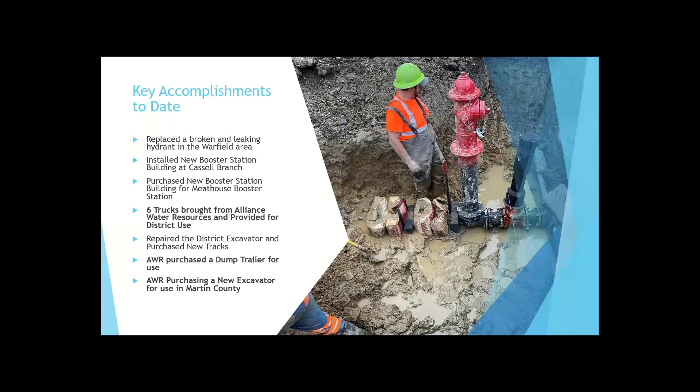An interesting thing to talk about is meter reading. I know that in the beginning, a big question was about the accuracy of meter reading, and it's continued to be an issue since we've been here. How do we go about it? Everyone's so spread out, there's such a large area, so many meters that all have to be manually read, and very few radio read meters.

We've gone through several iterations of how we're going to work this meter reading process, the cycles and times we're going to read them. We try to go all hands on deck for 1 week, doing nothing but meter reading. We did that for a long time, and we're starting to struggle with balancing major leaks and major problems in our system, checking booster stations, turning on pumps that we needed to turn on, and reading meters on time.

Towards the end of last year, we had a period with some rough issues in the system - we missed the entire week, ended up reading meters a week late, and then the next week read them on time. As many of you know, that starts to create a back and forth on the customer's meter reads - they'll have a low read one month and a high read the next month, and that's frustrating.

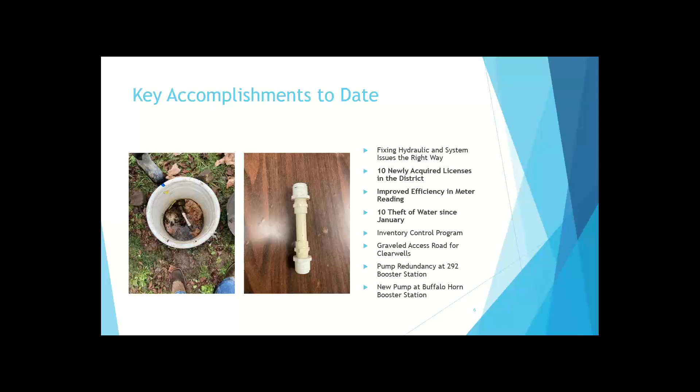It's a big win for us that we're able to get a meter in the ground, and that customer is now paying for water. Not only are we accounting for it, but he's also paying for it. So that's a good thing. We don't like the thefts, but if we can continue to fight it and help our customers understand that those who are stealing are only hurting the rest of the customers in the district, hopefully those will get less and less.

We're continuing to do some data collection for our capital improvement plan. One of my goals for this year was to complete at minimum a 5-year CIP for the district. I know I've shown you all a sheet several times that has multiple minor improvement projects over $30 million. Myself and Bell Engineering are going to sit down and break those out into much smaller sections. Steve and I are going to talk this afternoon after our meeting and discuss what areas we want to focus on and try to break them up into smaller sections that are more manageable for grant funding and funding sources in general.

Of course, many of you all know earlier this year the PSC released a rate increase, which is going to significantly boost the district's finances. We are looking at hopefully seeing the district in the black. My goal is to see the district in the black by June of this year, and continuing that process.

We're also in the process of a loan with Kentucky Rural Water, which if Kentucky Rural Water's here, they may want to speak to a little bit more than I. But the board approved the resolution last night to move forward with the process. And then, of course, we'll have to seek PSC approval for that loan. But we are in the works of procuring a loan for the vendor debt, to get the district out of debt with all of their vendors. And that'll be a huge win.

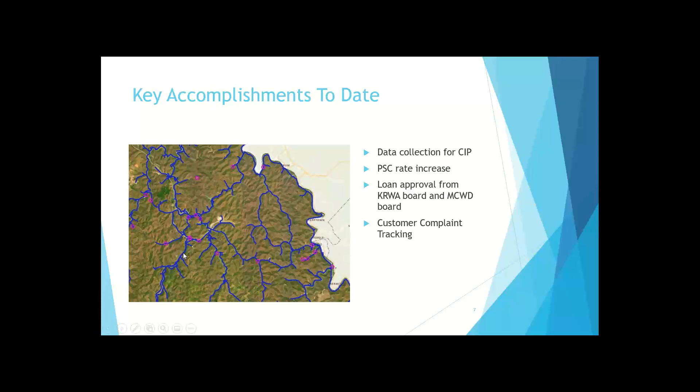You see these little pinkish circles, those are areas where a customer has complained. This complaint could be anything from my water bill was too high this month, or my water is cloudy, or they did some work and maybe they didn't do a good enough job with restoration, and just any number of complaints that a customer may have. We're logging those so we can keep track of them and see where we can continue to improve our customer service. So I think that's a real positive thing as well.

In talking about GIS mapping and water loss, I've had a couple of different iterations of this map as well, trying to identify all of the district master meter zones. My legend isn't in numerical order, but there are 23 master meter zones in Martin County. These different master meter zones, shown in different colors, each have a master meter for that specific area. As you can see, some of them have several different sub-meters, while some are metered specifically off of the INEZ master meter coming from the plant. So the green here in this - whoops, back up here, I'm going the wrong way.

The green here in the center is the INEZ master meter that comes out of the water plant. From there it breaks down into different subzones. You've got the turkey meter here, you've got buffalo horn, and you have cold water, which is this one right here.

That cold water zone is a pretty great one because it's treed. There's a lot of portions of our system that are treed, so this is one area that's a branch with no connections. We can really get to work quickly on water loss in this specific area and get accurate numbers because it's a branch at the end.

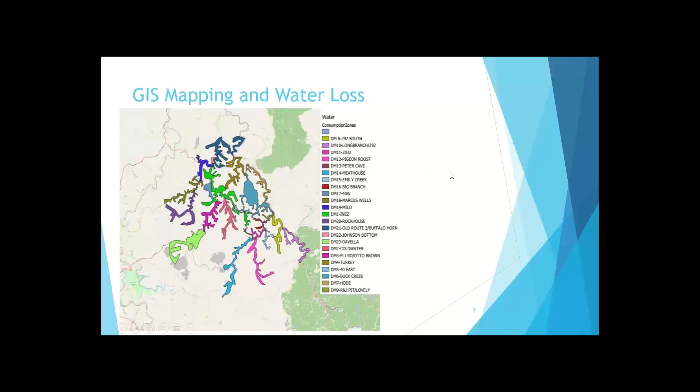As I've continued to dive deeper into this, it takes field work and office work, going out and turning valves, checking meters, turning meters off and on, replacing meters that are broken. We have 2 meters that we have to replace. We have them in stock, we just haven't gotten them installed yet.

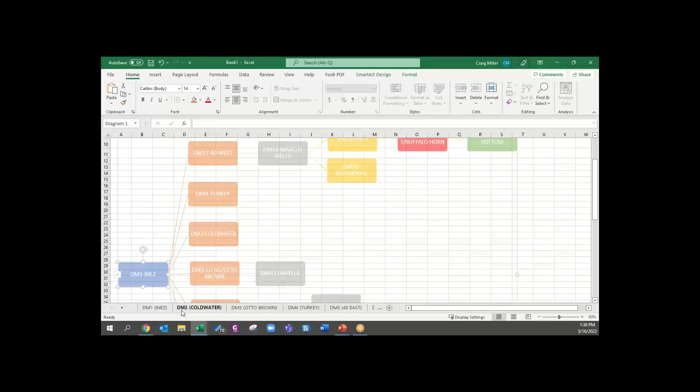So we have tabs for each one of our master meter zones. Let me zoom out a little bit. Is that all in there then? Okay, there we go. So you can see here, this is District Meters 2, cold water.

This is what I told you earlier, is that one branch where I can really identify what the water loss is in that area. We take a meter reading at the master meter every single Wednesday, every week. So this is the date, the meter reading, and the production, how much was produced in that area. When you come over here, you can see the total production in the system in January for the whole month.

You have week 1, week 2, week 3, week 4, and then total production. Then you have total customer consumption in million gallons, and then you have the water loss percentage. So the water loss percentage right now, as it stands, is...

77% at the end of February, just in the cold water area. We know that's a tree system. I call it a branch, but there's a ton of things going on, and cold water has been identified as an area that we need to seek funding for line replacement. There's a couple of sections of road on cold water where there are 4 different water mains going down the road. So we really need to look at this and assess it.

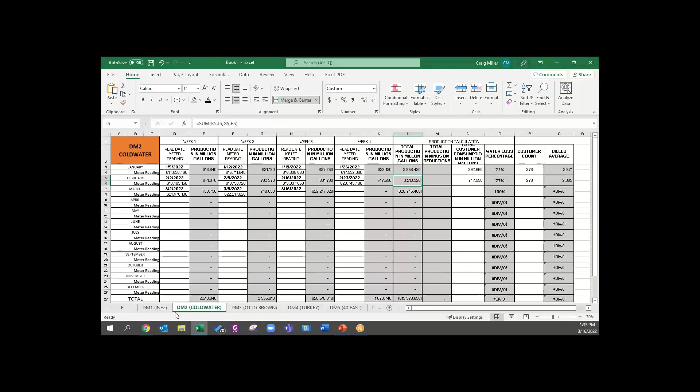That's something that we're running into time and time again as we go through this process. So that's a little bit about what we're doing on the water loss production, or the water loss process that we're trying to implement. Like I said, 1 question answered, 5 new questions.

But when you break down the numbers and start looking at them in the individual areas, it really does help us identify where we need to do our leak detection, and where we need to really press the most for funding agencies and funding sources for line replacement projects. It's been a huge help for building the CIP as well.

And with that, I'm going to turn things over to Steve and let Steve take over the project portion of the presentation. Steve?

Thank you, Craig, and good afternoon everyone. Thank you for the opportunity today to give a brief project status update on the water system improvements projects in the Martin County Water District.

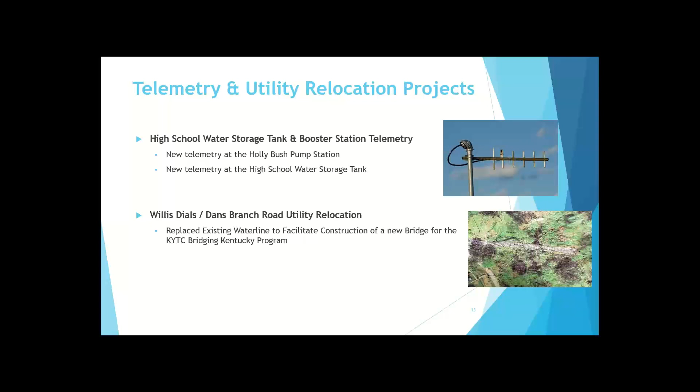Just quickly starting, as we often do, let's go over some of the projects that have been completed. Those include the high school water storage tank and booster station telemetry, and the Willis Dials Dans Branch road utility relocation. We've completed the hydraulic model, we utilize it to see how the system's operating, and we continue to adjust the model to reflect modifications to the system. The raw water intake improvements, pump purchase only — that was the purchase of the 2 million, the 4 million, the 2 million and the 4 million gallon per day water intake pumps, along with the 4,000 gallon per minute river screen.

And then lastly, the lovely mainline, service line, and meter replacement project. That project, as it was originally scoped out, replaced 22,629 linear feet of main line and service line, and 61 meters that were replaced with new radio read meters. And that's the kind that Craig kind of alluded to that you'd like to have all over the system.

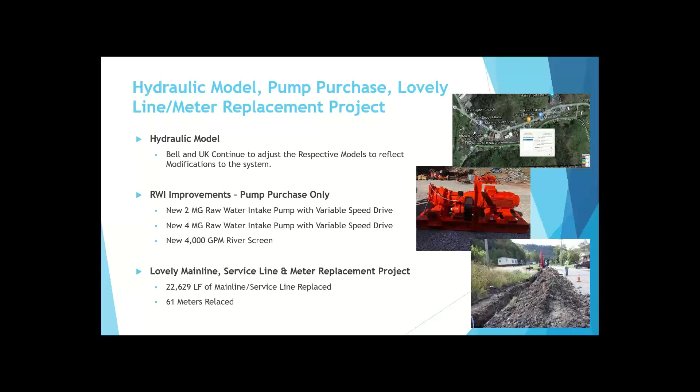When that project was done with its original scope, there was some money remaining — approximately $86,000. So the district worked with the Big Sandy Area Development District to come up with a project to utilize these remaining ARC funds. As you know, there's many projects and many needs in the district that need to be addressed, and the funds remaining were perfect for one of those needs: the Kentucky 292 South Pumping Station and Kentucky 292 South Telemetry Project.

It just so happens that the Kentucky 292 Pumping Station is located exactly where the ARC project ended — the last stick of pipe that was installed in the ground actually touched this pump station. However, neither the pumping station nor the water storage tank, which is a 100,000 gallon water storage tank that this station pumps to, has any operating telemetry. Being unable to monitor their equipment remotely greatly inhibits the district's ability to respond in a timely manner when they have leaks.

It affects their ability to monitor water loss, and should the pump run too long, it can actually overflow the tank and add to the water loss. Right now these stations have to be turned off and on manually, so if someone's working on a project and can't get out there in a timely manner, the tank may actually overflow.

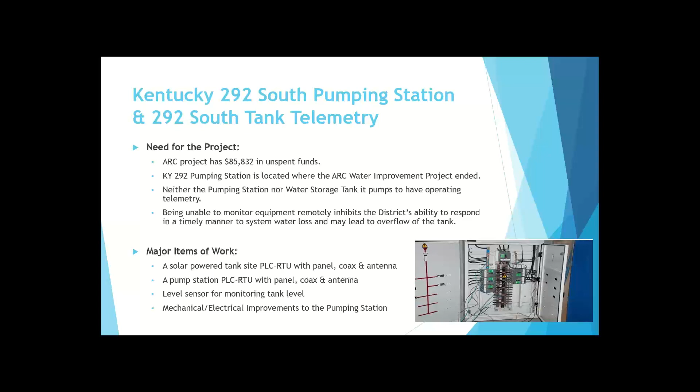What this will enable the district to do, from the water treatment plant or actually remotely from anywhere, is log in and see how much water is in the tank and see whether or not the pumps are running. They can actually turn them off or turn them on. So it'll be a great help to the district with some of the needs that they have. Again, very thankful to both ARC and the Area Development District for facilitating this.

The next thing we'd like to talk about is a project that's under construction. The big project is the improvements at the raw water intake and water treatment plant. At the intake, we're building a concrete ramp and winch system for moving the pumps up and down the slope. We're doing electrical building upgrades because the existing electrical building could not handle the controls for the newer, larger pumps, along with telemetry, line reactors, and instrumentation.

At the water treatment plant, we're rehabilitating clarifiers 1 and 3, putting in a new valve vault for clarifier 1, replacing the outside chlorine chemical feed piping, and replacing the master meter there. Project construction began on October 4th, 2021, with the scheduled completion date of July 31st of this year, with Pace Contracting of Louisville performing the work.

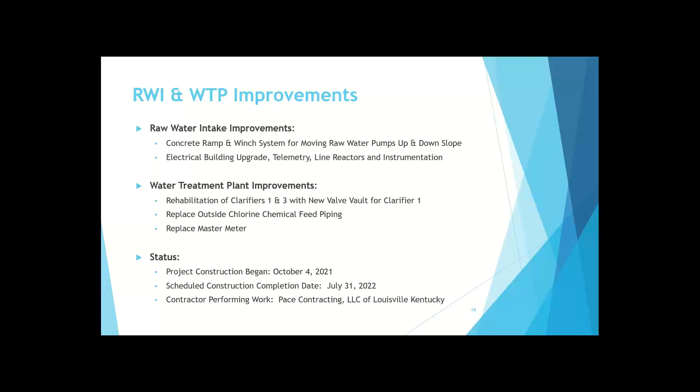As Craig mentioned earlier, we had a progress meeting today. It went very well, and the contractor appears to be on schedule. You see some pictures here. The top right is where we were pouring the top of the valve vault. You can see some piping on the side of the valve vault connecting everything up to the water treatment plant in the top left, and the bottom right picture shows what these units look like when they're empty.

Before we refurbish this entirely, we'll go in there and sandblast all the metal, recoat that metal, and also put epoxy on the concrete.

Work to date includes completed demolition, removing the media and filter, removing the under drains, and pouring the valve vault for treatment unit 1. The contractors also tied treatment unit 1 drain pipes into valve vault 1 and are in the process of tying valve vault 1 into the water treatment plant. As we've discussed before, this unit hasn't operated since 2009, but we're getting close. Hopefully within the next few months, we'll have this unit online and producing water for the people of Martin County.

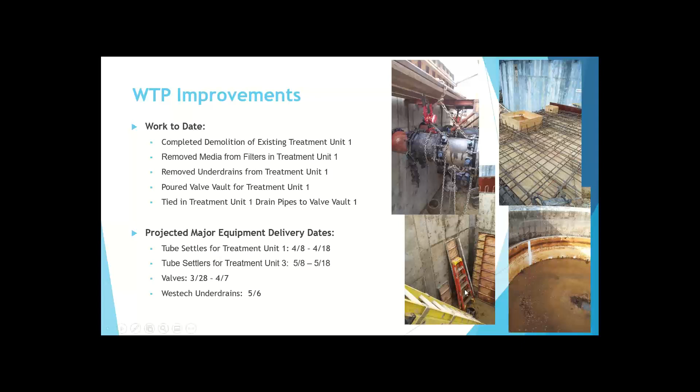We're getting a lot of specialty valves in for this piping, scheduled to arrive between the last week of March and the first week of April. The last big component being fabricated off-site are the under drains for this unit, and right now they're scheduled to arrive on May the 6th.

At the raw water intake, work to date includes excavation and pouring of a new concrete pump ramp, pouring a new valve vault, and switching the pumps to temporary power. As you can see in the top left picture, that's the existing electrical raw water intake building that is being demoed. They're pouring new piers for it now and will soon start rebuilding the newer, larger building.

They've basically received all of their equipment out there that they need, with the exception of some electrical gear, and that's scheduled to come in May of this year.

The good news is if these vendors hold those delivery dates, which so far they continue to say they will meet, this project, as originally bid, should finish on time, right around the end of July. Working with the ADD and the district, they were able to secure additional funding, and with that funding they've chosen to put back in the replacement of the roof over the chemicals stored at the plant, and also install a whole plant backup generator that will automatically power the plant during interruptions like an ice storm or flooding that might otherwise keep the plant down for days. They'll continue to run and produce water.

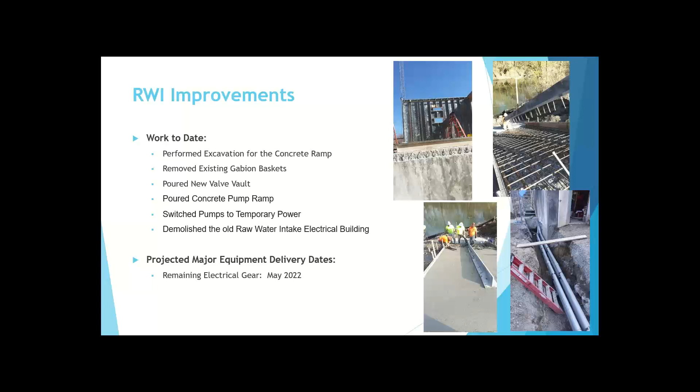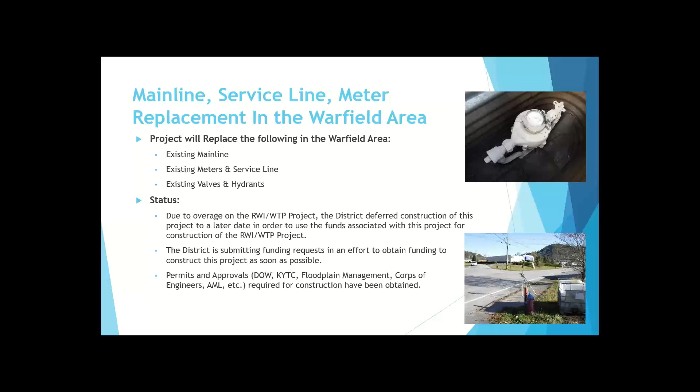Moving on to design projects awaiting funding. Craig mentioned the replacement of the existing mainline meters, service line valves, and hydrants in the Warfield area. This is the project that, due to the overage in the water treatment plant raw water intake project, we took that money away and used it for the plant because it had more pressing needs. Since then, the district has continued working to get additional funding for the project. That's what Craig alluded to, the $1.5 million that Congressman Rogers announced will be going toward this project. Once the funds are in place, this project can move to construction immediately. All the permits and approvals required for construction are in place and have been obtained, so this project is truly shovel ready.

We also have some projects we're seeking funding for. First, we talked about the backup generator at the plant and its importance. FEMA has a program right now where we're seeking funding for backup generators for some other pump stations. The application has already been submitted and we're answering some follow-up questions right now. This project would supply one generator at the raw water intake capable of running the largest pump there, the 750 horsepower VFD controlled pump, and then two fixed generators at the two largest stations the district has.

So if we have an ice storm or some kind of catastrophe, the plant can continue to run, the intake can continue to send water to the reservoir, and the largest stations can also continue to run. This would be a massive help in keeping people in service when a catastrophe might strike.

Some projects in design. The first is one we've talked about for a while: the penitentiary, Big Sandy, the Eastern Kentucky Business Park, and the Big Sandy Airport water improvements. As this project was originally submitted, there were some improvements planned for an existing pump station, a new tank, and a new pump station. However, as we've gotten into the system more, we've learned there are other deficiencies that have recently been keeping the district from pumping water to this area.